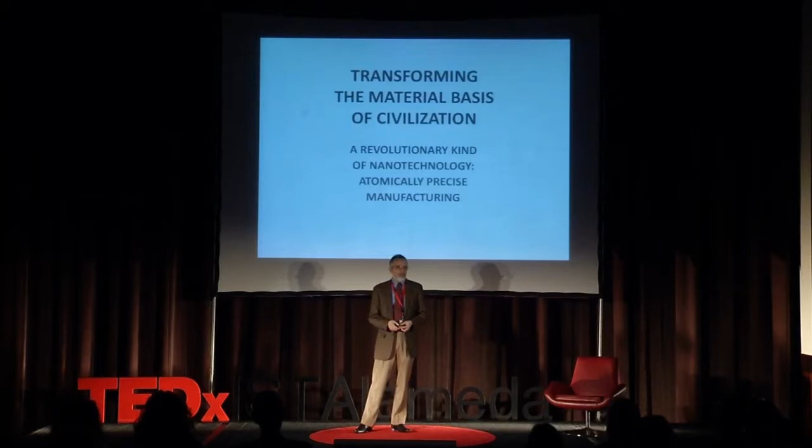Revolution. The prospect ahead is for a revolutionary kind of nanotechnology, something far beyond the material science that you may read about every day, something that has some parallels with the greatest nanotechnology that we have today, which is the nanotechnology that powers the information revolution. Computers, telecommunications, today these are based on what is not called nanotechnology, but it's the technology of nanoelectronics, nanoscale devices working in billions together to arrange patterns of bits.

What makes this technology important isn't the gee whiz, the inner quality of it, but its potential for addressing urgent global problems. Transforming the material basis of civilization is what is necessary to do that. The collision of industrial civilization with the Earth's limits is the great story of our time, from the point of view of crisis at least. And that crisis is based entirely on constraints on what we can make and how we make it, the energy required, the equipment, the products, and how those work.

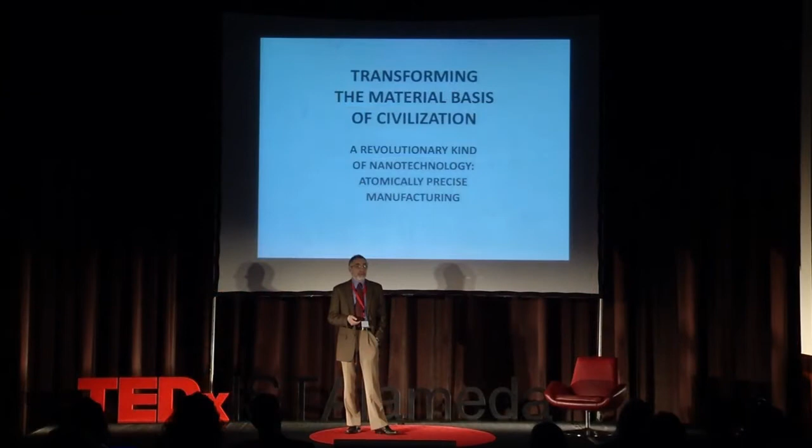Is there any possibility of fixing this so that I can advance the slides? I'm about 2 slides ahead here. There we go. This worked the first time, and it seems to be working now.

So, the Industrial Revolution was based on learning better ways to use tools to cut metal. And that revolution carried us very far. People eventually learned to shape metal into the rocket engines that took our civilization to the moon. And doing so brought a new perspective to the world. The environmental movement was largely launched by these images of the Earth as a finite, closed system.

And I came of age during the time of the environmental movement. I had a very small participation in the first Earth Day. And when I went to MIT, it was with the aim of trying to address this problem, this collision of industrial civilization with limits to growth. And so I studied space systems engineering as one way of looking beyond these limits and constraints.

And there I joined a community of people who taught me something very important, which is how to dream bold, audacious visions and make them concrete and detailed and quantified, to look at what can be done by thousands of people with billions of dollars over perhaps decades, and produce concrete results that are subject to quantitative analysis where people can check the numbers. And so that perspective is one that I found myself turning to the molecular world, because during the 1970s, people in the molecular sciences were learning how biology works.

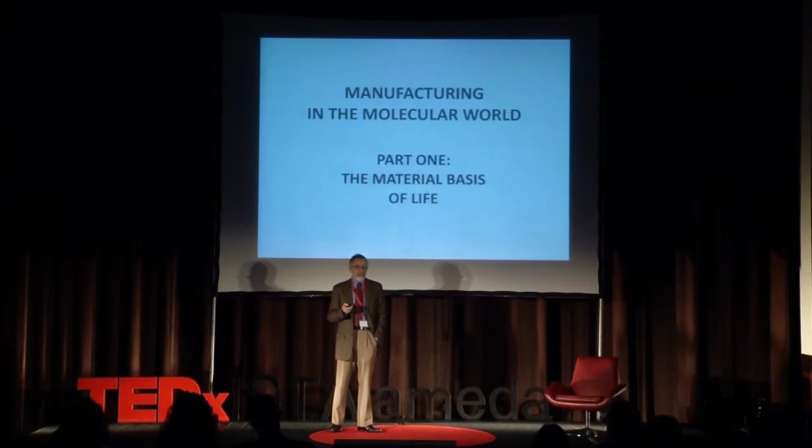And what they found at the bottom was a manufacturing process, the first of the molecular, atomically precise manufacturing processes that I'll mention, which is the material basis of life, which centers on genetic information, digital information being used to drive a manufacturing system, a productive piece of machinery.

Now, when I began to study this, I asked the question, what can we build with these tools? And soon concluded that it should be possible, would be possible, to learn to design and fabricate materials made of protein that hadn't been seen before. I published the first paper in this area, the one that founded the now burgeoning field of protein engineering.

And when I speak of using these tools to move forward to build better tools, much as blacksmiths built better tools to move toward the Industrial Revolution, it's important to recognize what protein is. And when I say protein, people think of meat. Meat is mostly water. Instead, I would like you to think not of meat, but of horn. And horn is an engineering material.

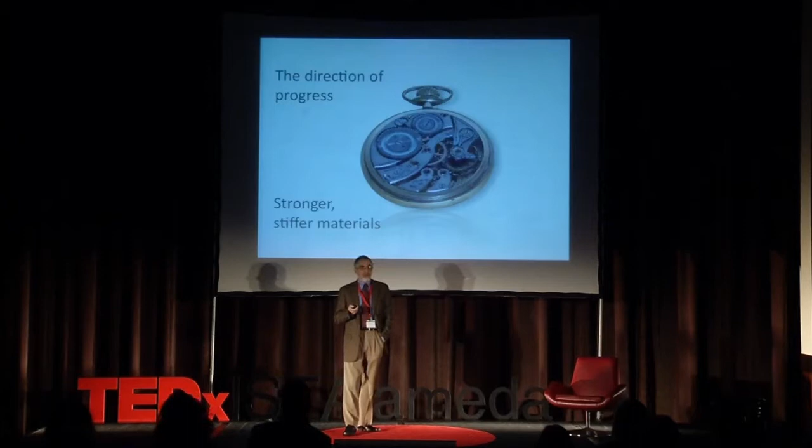Now, in addition to being a hard material for weapons, it's an engineering material. As master craftsmen in Russia demonstrated in the 19th century, one can build something as intricate and precise as a pocket watch from wood, a similar biomaterial. And as with blacksmithing and progress toward the Industrial Revolution, the direction of progress, once again, will be toward greater control, better materials, the ability to make better devices and better machines, using tools to build better tools and to put parts together.

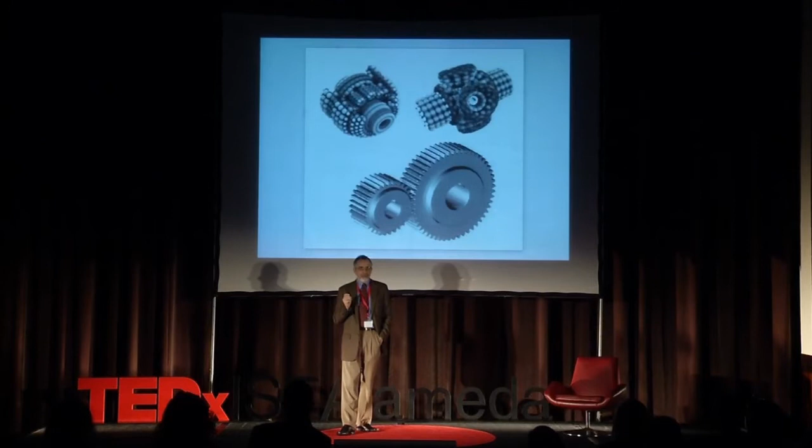Now, what I discovered in investigating this area, is that the kinds of components that are used to make machines in the macroscopic world today almost always have potential counterparts in the nanoscale world. That devices like planetary gears, same function, can be built where the gear teeth are rows of atoms rather than pieces of steel. Differential gears, the same behavior, the same motion, the same function. And gear systems. Those are examples.

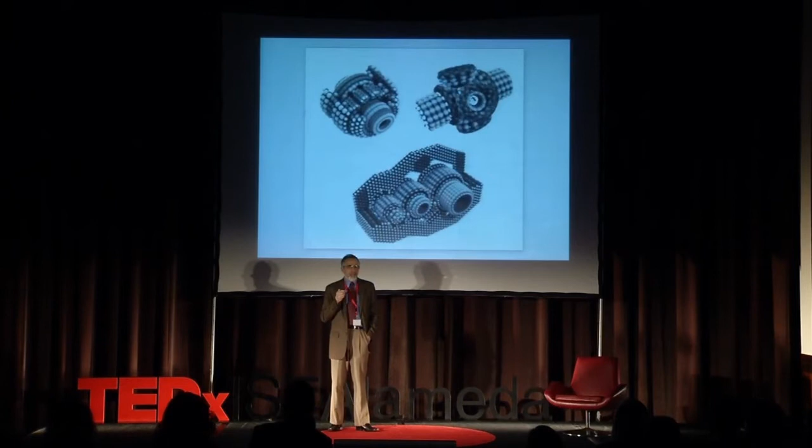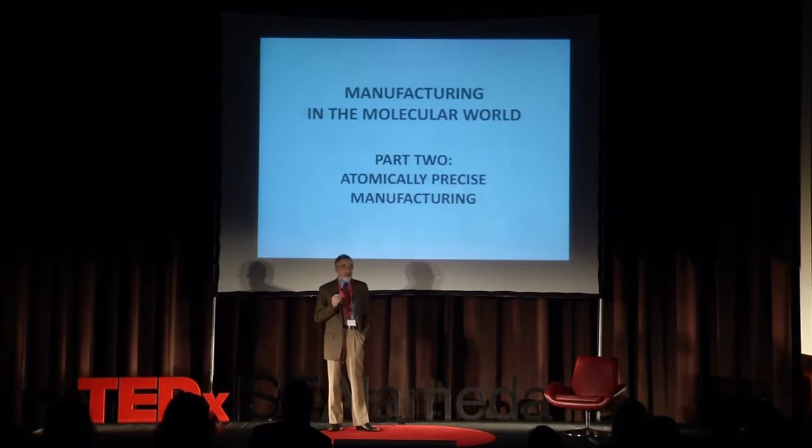They include drive shafts. They would be connected to nanoscale motors, bearings to allow the motion. And with these components, mechanical engineers know that they can build complex systems, including the kinds of systems that are used in manufacturing. And so this opens the door to manufacturing in the molecular world in a style that's very different from what we see in biology.

So, in factories today, you find moving parts, taking components, bringing them together to assemble larger structures. And if you looked more closely at these machines, you would find gears and bearings and shafts and motors and conveyor belts. And all of those machines that execute these patterns of motion to bring parts together, form follows function. Motion paths to bring parts together are similar on the nanoscale and macro scale. The analogies are direct, very concrete. And so with these technologies, when we have the tools to build them, one can build manufacturing systems on this scale.

I should note a little background reading for scientists. This area of study is at the juncture between the molecular sciences and mechanical engineering. And mechanical engineers, by and large, do not understand the molecular sciences. And molecular scientists, by and large, don't understand mechanical engineering. And as a result, ideas have fallen through the cracks. There's been enormous confusion. Mythologies have developed, and there's a need for a much better grounded discussion.

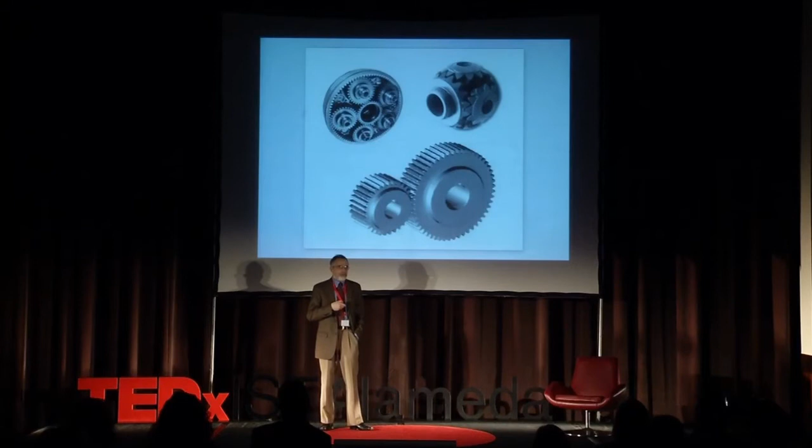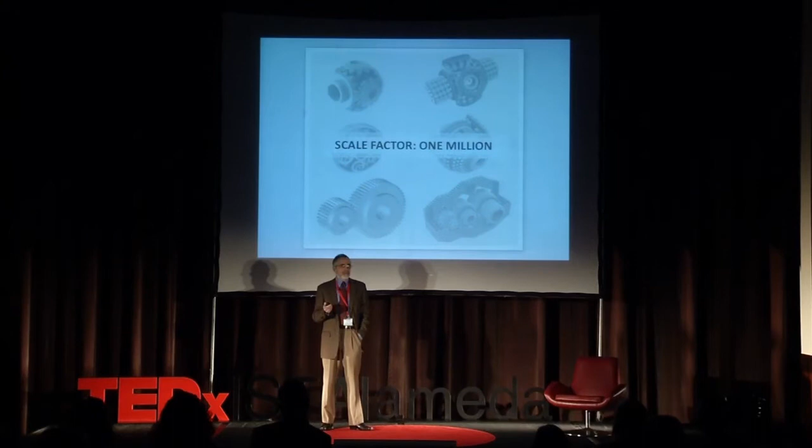You can see in nature how scaling laws work. Large birds flap their wings about twice per second. They're on a meter scale, factor of 10 down in size, 10 times the frequency, and so on. And extrapolated down to a 1 micron scale, you get rates of operation of 2 megahertz in this example. So it turns out that if you go through the exercise of designing these machines, you can measure the size. And the sizes are smaller by roughly a factor of 1 million. And so the scaling factor of frequency in this instance is a factor of 1 million.

And what that means for manufacturing is enormous. When you get a factor of 1 million change in a parameter in engineering systems, you open a new world. It's fundamental. It's like the difference between a chemical explosion and a nuclear explosion, the difference between having a rocket that goes up into the air and falls back, and one that travels out of the solar system on a journey of decades.

A factor of 1 million in speed means 1 million times more components per second per individual machine. Per ton of machine, it means 1 million times as much mass throughput. If a macroscopic machine can process 1,000 tons of material in a year, analogous nanoscale machines could process 1 billion. And that is where the potential for world-scale change comes from in this technology.

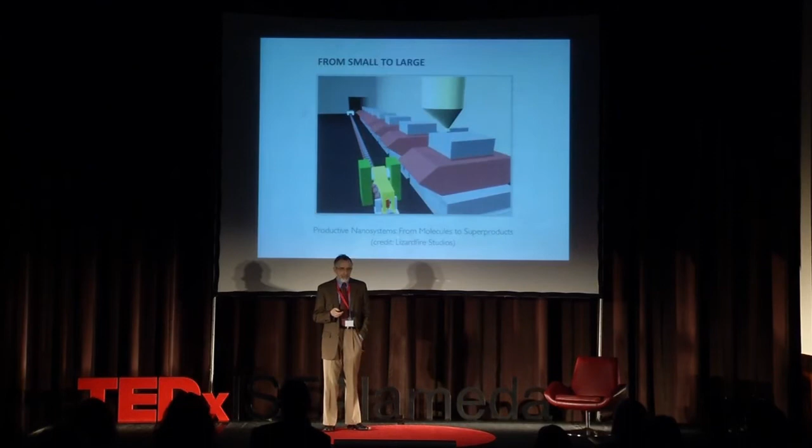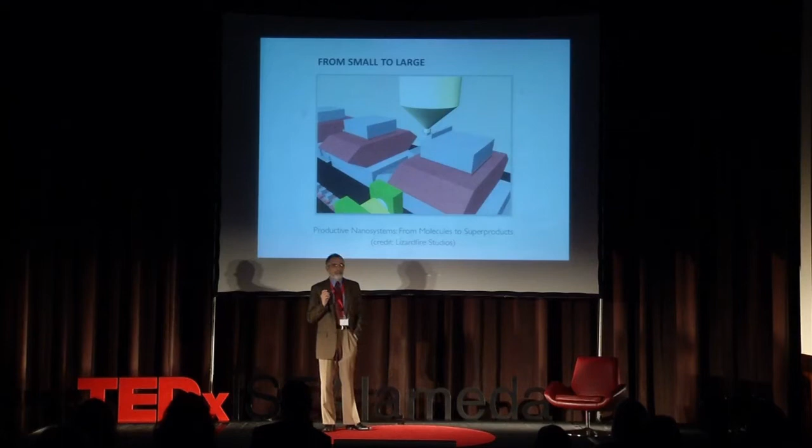So I've spoken of putting pieces together to make larger pieces. Here is something, again, like the components you see in factories. This animation was actually done by a mechanical engineer. What you saw there are small blocks being put together to make larger blocks. Now, spanning the gap between the nanoscale world and the macroscale world can be remarkably direct. Taking small building blocks, they can be put together in parallel by many machines working together to make larger and larger structures.

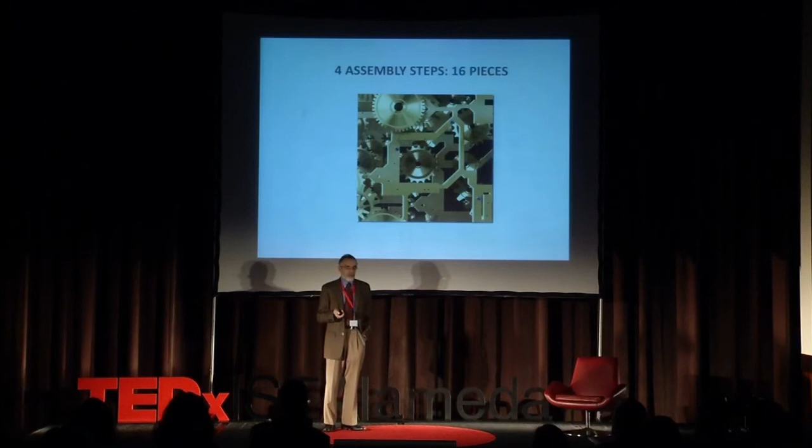And the scaling law for this kind of assembly is one in which, well, let's see, that example showed 4 assembly steps putting together 16 pieces. Take that forward, and one finds that 30 steps put together 1 billion. Of course, the purpose isn't to put together little tiles, but to put together intricate 3-dimensional objects, which might be made of superior materials, denser computational systems, putting blocks together to make larger blocks, which ultimately can be assembled into more familiar macroscopic systems.

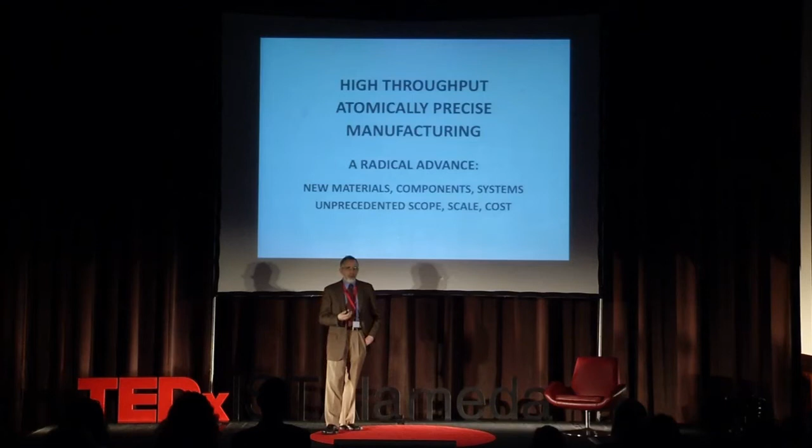Now, if that block, the cubic centimeter scale, were a system built with atomic precision, it could hold 1 billion processor cores, 10 billion gigabytes of information storage, far beyond anything that Moore's law of progress promises. Building up with atomic precision from the bottom is a very powerful approach to improving technology. So I've addressed high throughput, which comes from scaling laws. Atomic precision comes from starting with nature's atomically precise molecules and putting them together while not losing that precision.

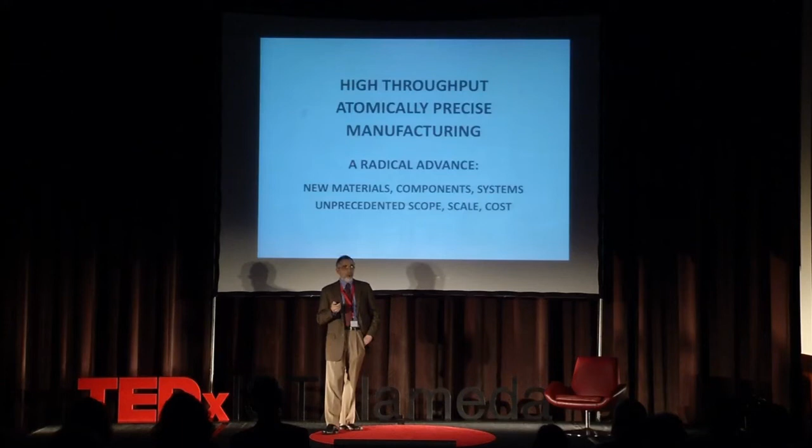Atomic precision leads to new materials. Structure of matter can be controlled much more thoroughly. New materials lead to new components and to new systems. From this comes an unprecedented scope of production, the range of things that can be made, broader than what's found in industrial civilization, increases in scale of production, and reductions in cost. Billion-fold improvements in information technology, 10 to 100-fold improvements from better materials in aerospace, and even in mundane areas such as housing: lower cost, higher strength, higher efficiency, immunity to earthquakes, tornadoes, hurricanes, production on a scale that could bring a very high standard of living to people around the world.

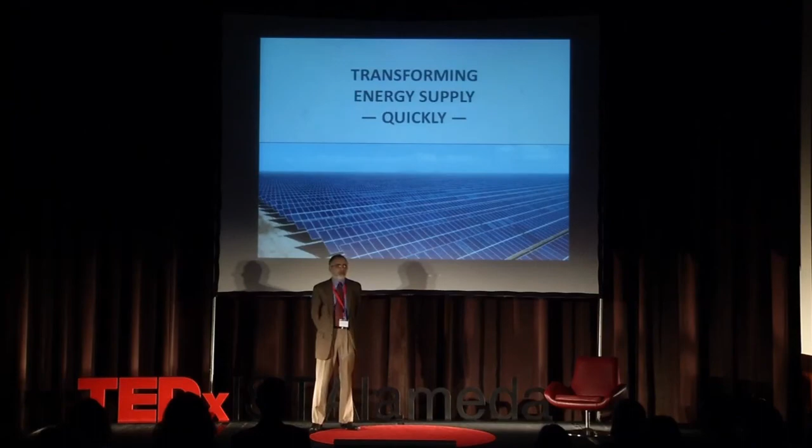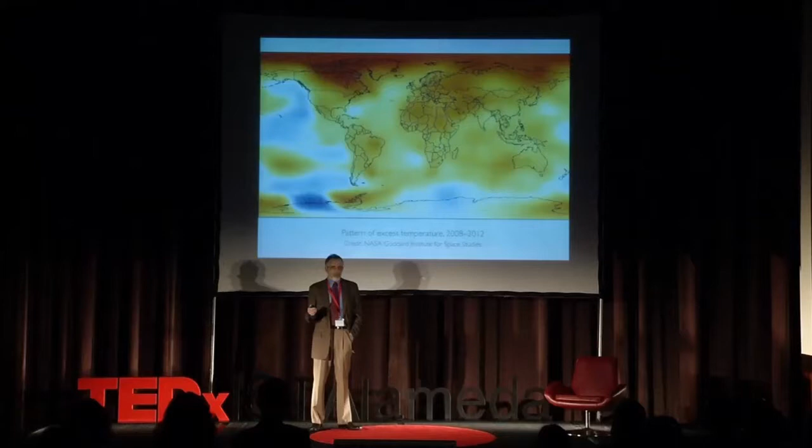Now, what makes a change in our industrial technology base very urgent today, and this illustrates the notion that these systems resemble printers, digital information in, complex products out. What makes it very urgent today is that there's a need to transform our energy supplies quickly to move away from carbon to renewable sources like photovoltaics, and to deal with the increasing CO2 problem, which is changing climate rather rapidly. Levels increase despite international agreements and efforts to change technology and so on. They're expected to continue to rise.

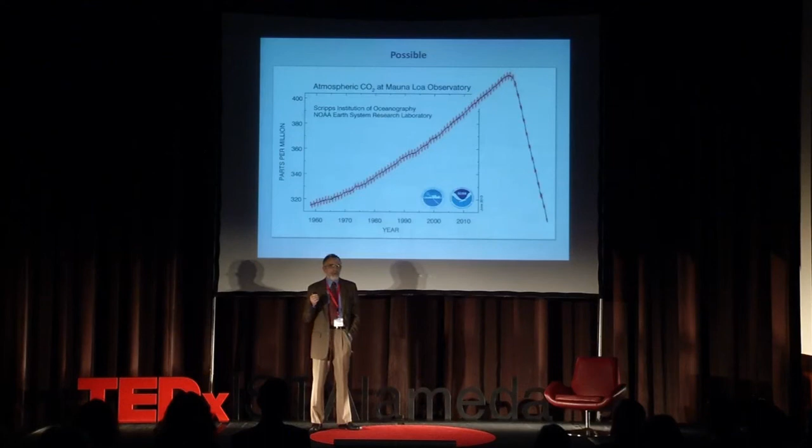And to have the 21st century have a planet that resembles what we've had in the previous human history will require taking the CO2 levels down, and that is an enormous project. One can calculate the energy required. It's huge. The area of photovoltaics required to generate that energy is enormous. The costs are out of range of what can be handled by the world today.

But the prospects with a better means of making things, more efficient, more capable, are to be able to do a project of that scale at low cost, taking molecular devices removing molecules from the atmosphere, photovoltaics produced at low cost to power those machines, can draw down CO2 and fix the greenhouse gas problem in a moderate length of time once we pass the threshold of having those technologies. And that is a matter of using tools to build better tools. We've gotten this far to the scale of the Industrial Revolution. We now have in hand tools for beginning to build with atomic precision, and we can see pathways from there to a truly transformative technology.

So the future today increasingly looks, as many people feel, rather bleak. The collision between our industrial civilization and the limits to Earth is becoming more urgent. Many people look forward and they don't really see a future. But now we can see a path that leads to a very profound change in how our civilization works, how it interacts with the world, one that can make a different 21st century. And so I think that in our homes, in our businesses, and internationally, it's time to begin to change our conversation about the future, to consider prospects that are very different, prospects that offer a new kind of hope for the future of our civilization.